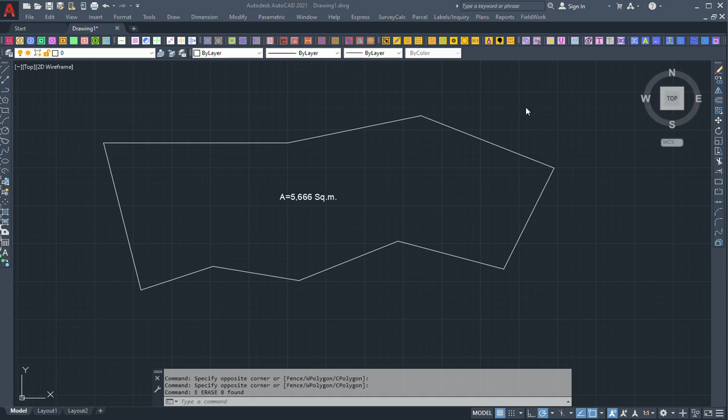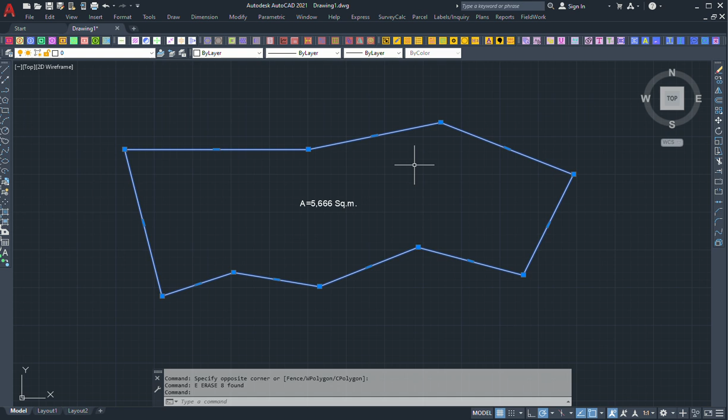Morning. So how do we subdivide land here in SurveyCalc? In this example, I have a closed polyline representing my lot, my parcel. The area of this is 5,666. So I will subdivide this parcel automatically.

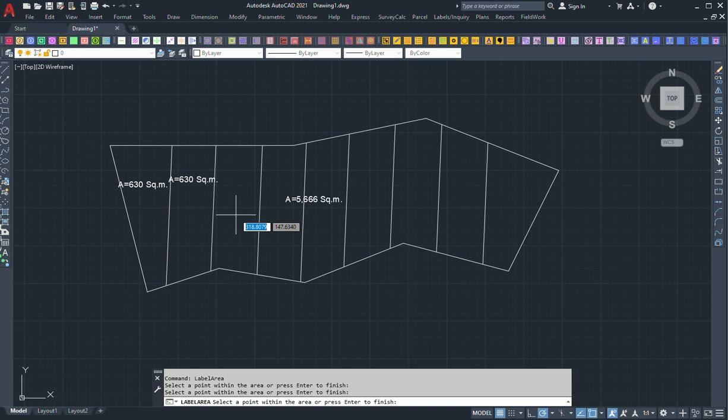It will divide it equally, so let's check the areas. Click at 630. Okay, then close. So that's the portions option. For example, let's erase this.

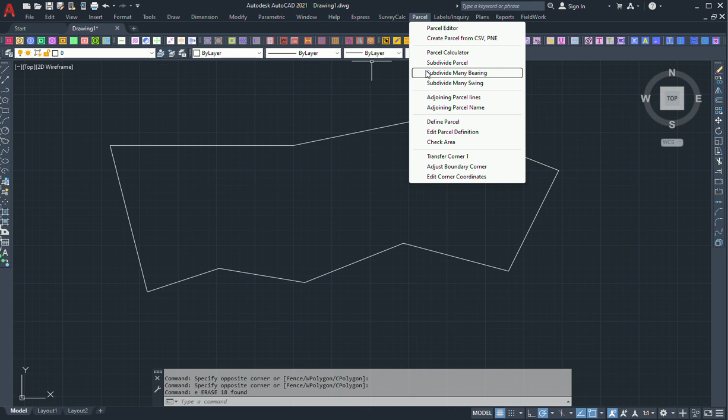Now for the area option. Parcel, Subdivide Many Bearing, meaning let's select. For example, you want to subdivide into 500. So if you want the subdividing line to be parallel here, click here too. That's the direction of your subdividing line.

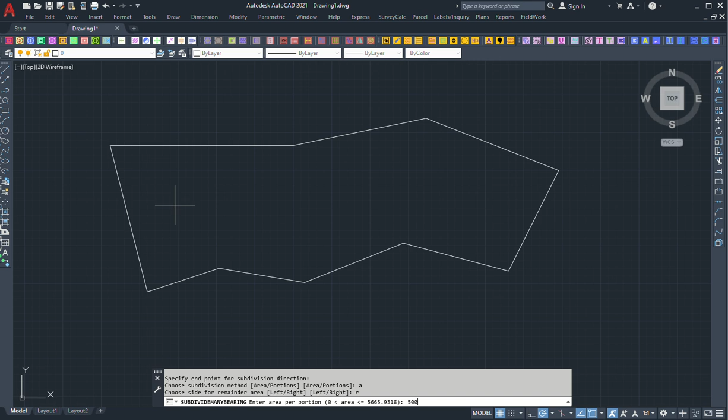Then we use the area option. Now for area options, there might be a remainder. So it's asking where you want to put the remainder. For example, here you'll put the remainder on the right side, so type R for the right side option. Then enter the area per portion, for example 500 per portion. Then enter. It will place it here.

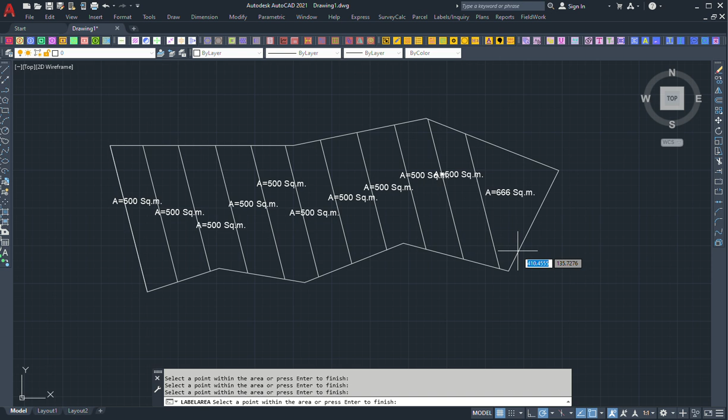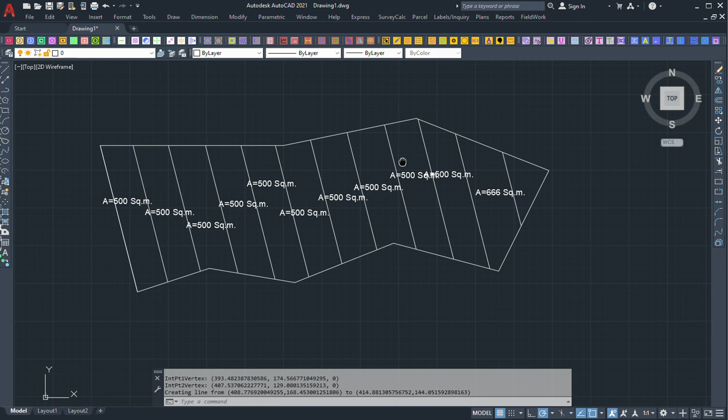Let's just use our usual parcel calculator, add 500. Okay, so that's how we subdivide parcels. Thank you.